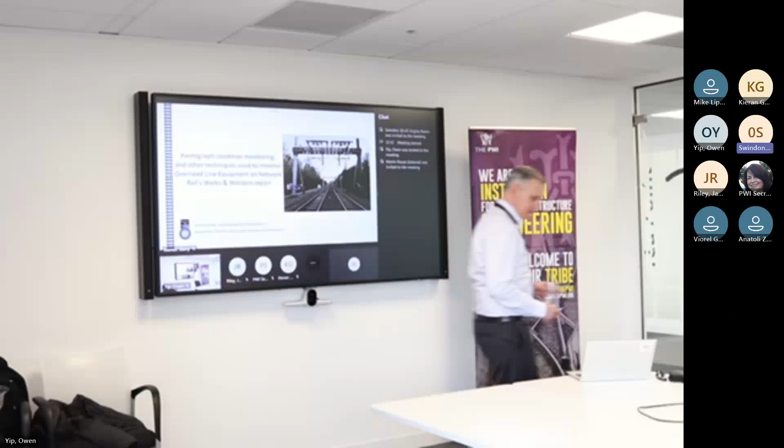So quite a bit to cover. So first of all, thanks for inviting us back. It's the third time we've done a show with the PWI. So come in, it's good to be back. We've done a couple of sessions over the years with the IET. So pleased to be back, and it's nice to be valued.

So this is a bit different. This is about pantograph monitoring, and we're going to take a look at that and what we've learned. And Jay is going to spend some time looking at the case studies. I'm into quite interesting case studies where we're on a journey with this stuff, and we've learned quite a bit. So that's what we've got.

You can see it on the screen. So we've got a system called PanVue, which is a set of overhead mounted cameras or line side cameras which look down at the pantograph. And there's two cameras and a series of illuminators, and that will take an image and that will produce a 3D model. From that model, you can then look at the carbon condition and the pantograph condition. On the side of the track, you can see these two items here, devices. They're the train identification system, and that takes an image as the train goes through. But there is an added benefit, which is not just looking at the pantograph. You can actually look at the side of the train, and it is useful for the train operators to look at the side of the train to look for any damage, vandalism, whatever it may be, and useful for that, as well as being train detection.

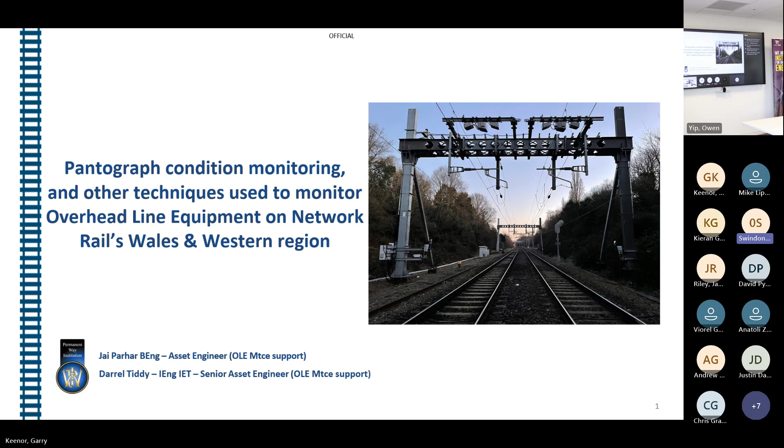Okay, so I won't go through the agenda in detail, but as you can see, there's some key items there. We'll have a look at why it's important to monitor pantographs, why we do it, where we've got PanVue, which is a system produced by Camlin, a little bit about maintenance, and then Jay's going to look at some case studies. Then we move on to a little bit on thermal imaging, which we've used to good effect on the region. And then we'll open it up to some questions and answers.

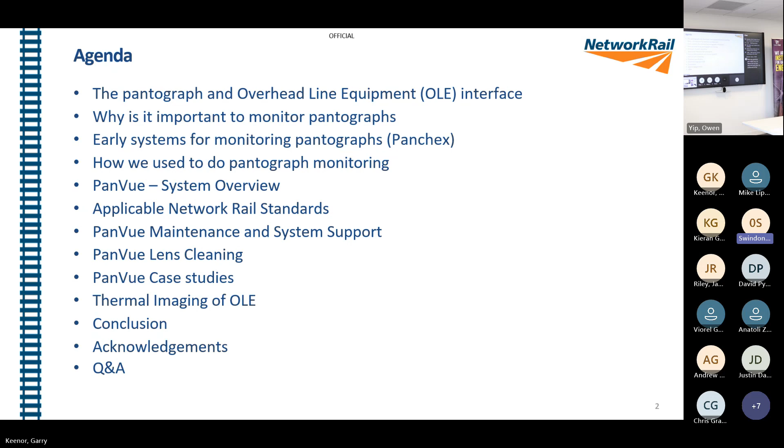Okay, so that's a view from PanVue looking down. And what you can see is a nice, clean pantograph, no damage, no chipping, contact wire. You can see the catenary and the contact wire on the carbon there. And as the OLE engineers in the room know, it's always a balancing act between the correct geometry and the grading of the wire and the condition of the install and the maintenance and the management of pantograph. So everything needs to come together to give us that good current collection interface. So there is this challenge of getting design, we put it into construction, what we end up with is something sometimes a little bit different. So a good interface is important. That's what gives us good current collection.

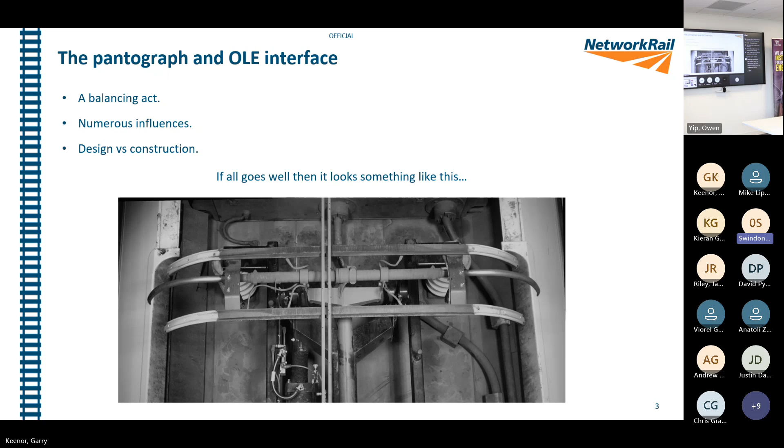And what PanVue does, it allows us to pick up anomalies if those interfaces go out of a good relationship. When it all goes wrong, sometimes that's what you can end up with. That's what happened with us. We managed to lose pantograph, and we've got all sorts of things go wrong over the years. So early detection is important. You see that you catch something before it does go wrong. So that's the same on the overhead line and with the pantograph.

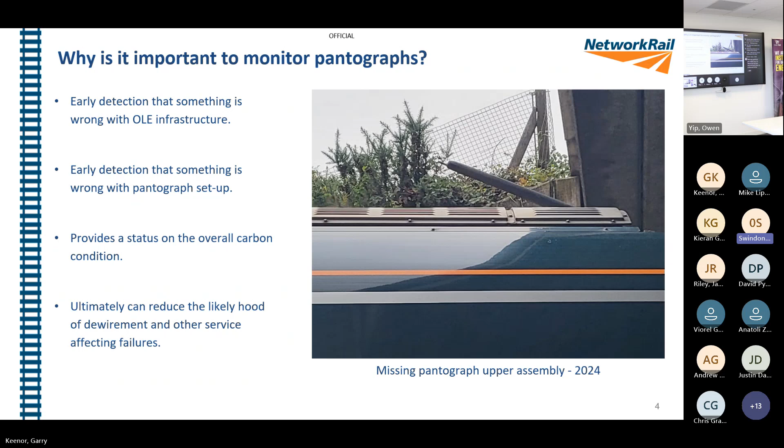PanVue gives us a good status on current collection. So if pantographs aren't chipped or bumped, or the horns aren't bent, or whatever it may be, you can see that on PanVue. So pantograph monitoring gives us that sort of holistic, almost real-time view of what the pans are doing. And pantograph monitoring, as we've used it on Wales and Western, has prevented several dewirements in recent years, and Jay will go through those case studies shortly.

And as we then installed Great Western Electrification and marched all the way to Cardiff, there was no pantograph monitoring system in place, albeit in some kind of fashion. It was in the scope of Great Western Electrification. I think for budget reasons it dropped out, but we were short of any pantograph monitoring capability.

There was a major incident in 2017 where we managed to shut the railway for 2 days between Paddington and Heathrow, because one pantograph was severely damaged and we couldn't find out where that had happened. So we had to put an MPV all the way at Paddington and send it to Heathrow and back. That took 2 days and nights. And then the route director said, 'You can't even find the haystack, never mind the needle.'

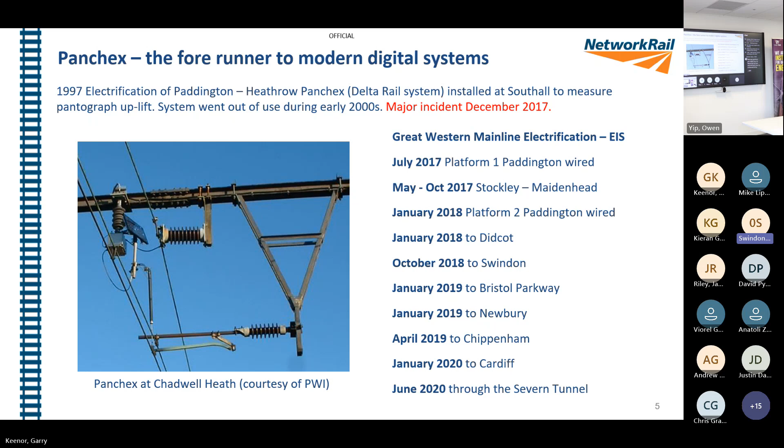That's why we do it. And of course, we had this sort of gulf where we had no pantograph monitoring system on the network.

So the way we used to do that was we'd get notified by members of the public if there's a problem with pantographs running around, or by the TOCs more often than not, or we'd put people on bridges. There was many an hour spent on a bridge in Paddington or somewhere else looking at pantographs with binoculars, for long hours on end, monitoring which trains were damaged and where they'd been, and looking at our train management system, CCF, to see where the train had been. So that was quite a long and laborious task.

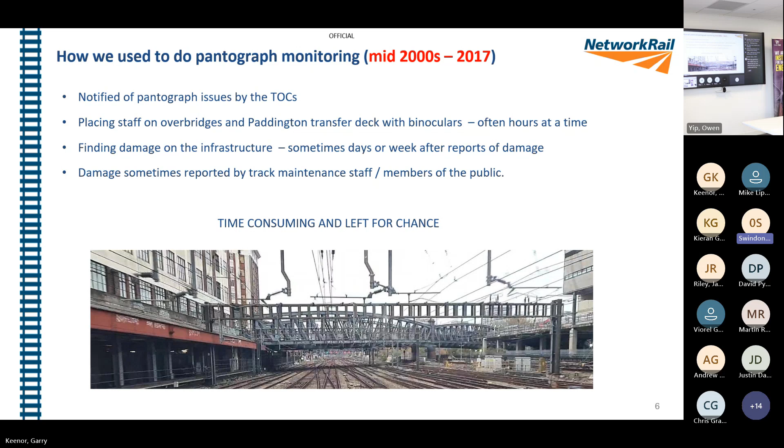As we all know, inside Paddington Throat is a very busy area, and so are other parts of the network. Bridges have been a place to run to when it all went wrong.

During late CP5 into CP6, the requirements document was written, and in CP6 these pantograph monitoring stations were installed across the network. As you can see, we've got a couple in London, Reading, Didcot and Bristol, and we've got the Heathrow installation as well.

So we've got the route pretty well covered, and they're strategically placed. We can see if we've got a problem with trains in and out of Wales, and in the Severn Tunnel we've got Didcot, which is the halfway point, give or take. There are trains going down to Newbury from Southcote Junction, and then trains in and out of Paddington, covering off some of the Crossrail services.

Vegetation is another factor, because we've got bi-mode trains, and trains going down to the West Country and into West Wales can come back with vegetation on them. So we use PanVue to help us pick up vegetation issues as well.

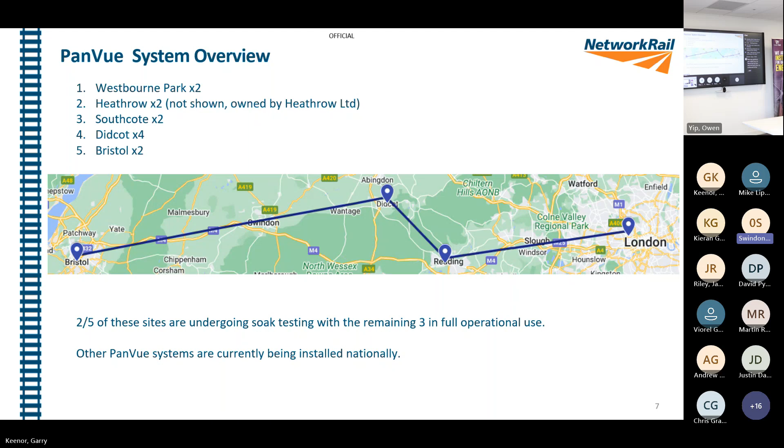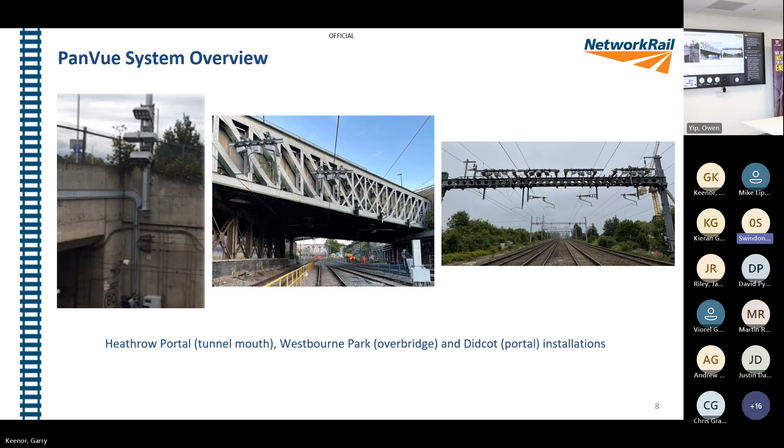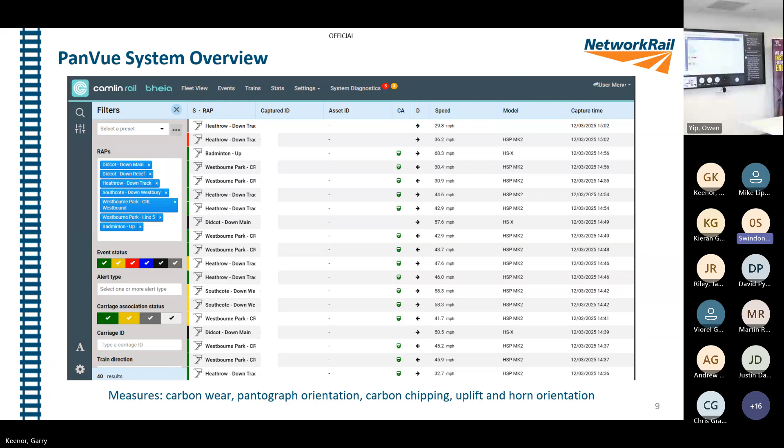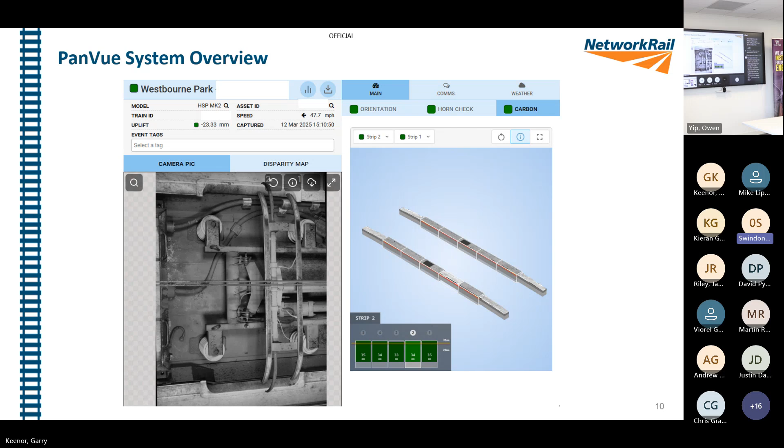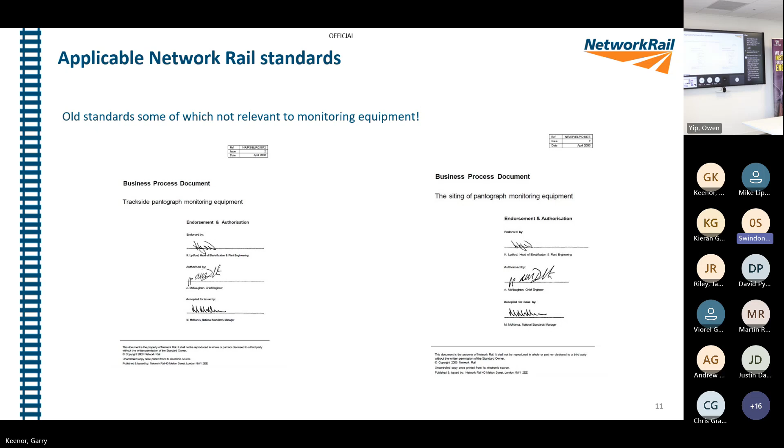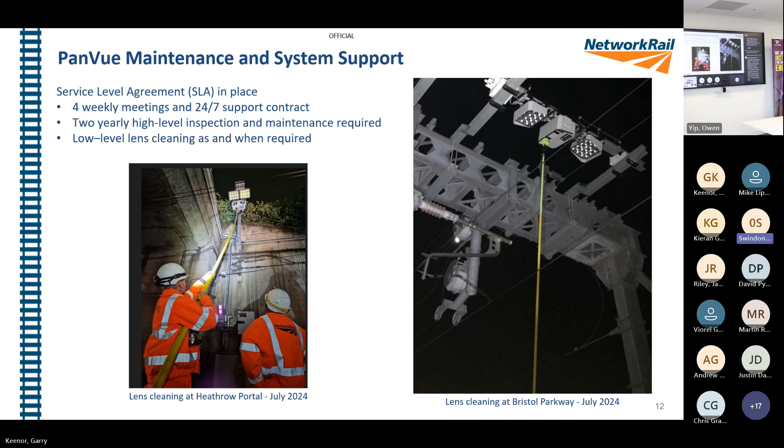So the lens maintenance is important, just like glasses. If your glasses are dirty, you need to clean the lens. So we do an annual clean off a pole. There was an isolation in place. They're insulated poles, as you can see, but that was done under an isolation just to give the lens a clean. Otherwise, you end up with a bit of fog, which is what we see on this slide.

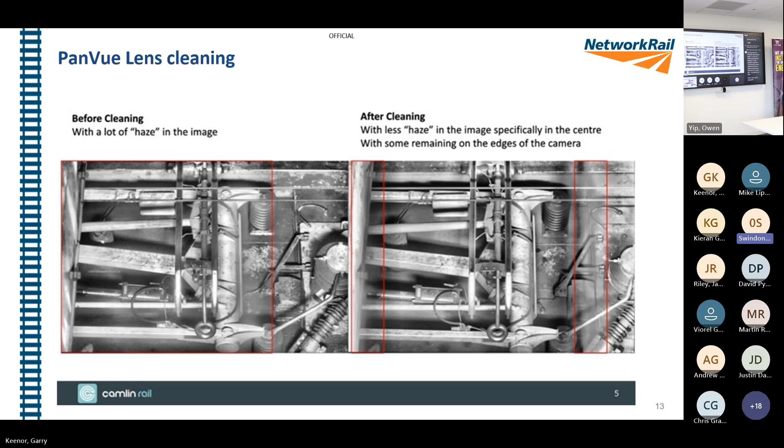Okay, over to Jay. Thanks very much. Oh.

Yes, good afternoon, everyone. So next I'll be talking about some case studies from PanVue, as well as a thermal imaging trial we've done. These case studies will go through the process we applied when we had an incident related to the pantograph, and how we used PanVue to find a solution and then rectify that as a result.

So case study 1, I'd just like to introduce the concept of contact wire uplift. Traditionally, this is measured from the static position of the contact wire with no pantograph present. So that's 0.0 millimeters of uplift. And then when a pantograph passes at a point, you can take a photo, and you can then calculate the difference in contact wire height as the pantograph imparts the vertical force on the contact wire.

Now, the way PanVue does that is slightly different, given that it is taking a picture already under a dynamic condition, so your reference point is already different. During the commissioning of a system, for a 2 to 4 week period, it will take an average of where the contact wire is across those weeks, and that is then your baseline or 0 mm reference point. From then on, any event with a pantograph and wire above that reference point is known as positive uplift. Anything below that is negative uplift.

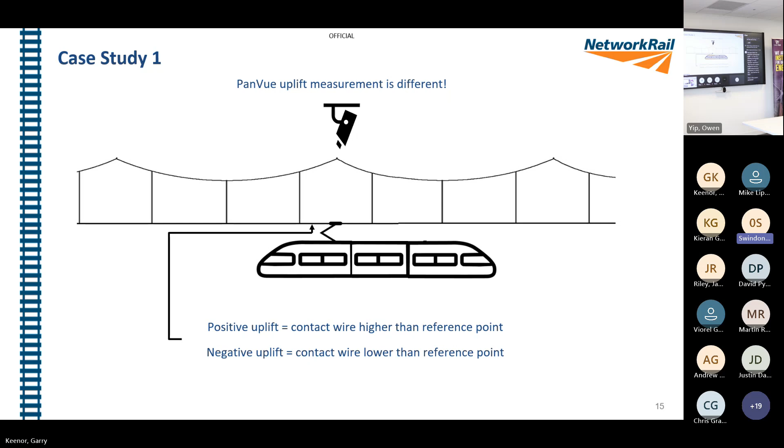So in terms of how we analyze the uplift, there's an analytics page as part of the Thea dashboard that Darrel showed. And this is the normal distribution you would expect: a normal bell curve centered on the x-axis, -10 to +10 millimeters of uplift offset. You'd expect everything to be around 0, indicating that everything is within that reference point, which has been set already. And then you would expect the uplift offsets to drop off in a nice curve shape as you increase in positive and negative uplift.

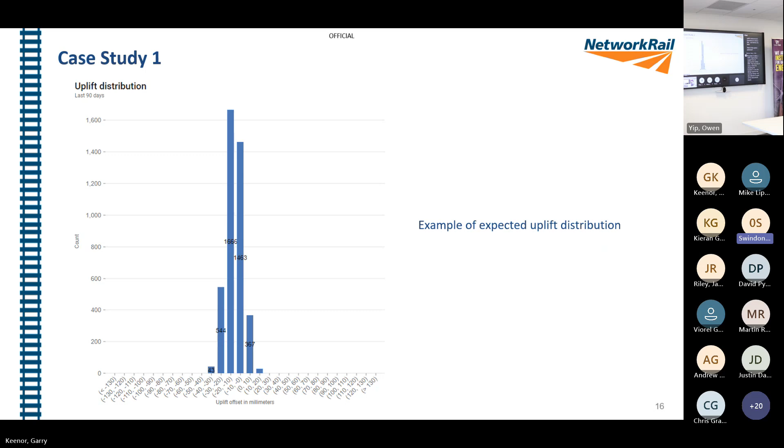So in terms of an incident where we had to use this feature, we had an ADD on the 8th of December 2023. An ADD is an auto drop device in the pantograph carbon, so a pressurized tube. Essentially, if the pantograph carbon takes sufficient damage, that tube will depressurize and drop the pantograph to protect the train and the pantograph.

So we were presented with the image in the bottom right indicating pretty serious damage had occurred, and the normal process we apply is to then request pantograph camera footage, which you can see in the top right there, which was taken inside Heathrow Tunnel.

And the problem with Heathrow Tunnel is that it's very dark, it's not lit like most tunnels, and the best information we had to go off was that image, which just showed some arcing and some steelwork between the pantograph and that. Then we went into the PanVue system itself, looked at the previous event for the train for ADDs, and we saw that image on screen indicating that there was already damage present, and pretty serious damage at that. On that leading carbon, you can see 2 big chips already on there indicating that something had already gone wrong, and that essentially that ADD wasn't just isolated to that one journey that train had made.

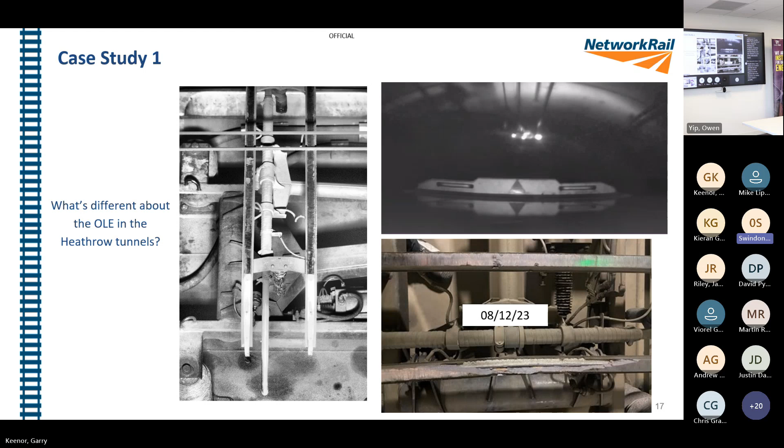So a question to keep in your head, and a question we had to ask ourselves was, what is different about the OLE in Heathrow Tunnel? Why did this train ADD only there? Why didn't it happen anywhere else?

So going on to, again, the analytics. So for this relevant train, there are 2 pantographs present, so therefore we have 2 different sets of uplift to look at. And this particular site had an issue with the uplift offset, essentially where the graph was shifted to the left. So there was an incorrect offset applied, but the shape and the curve distribution is still as you would expect. You can just think of the graph I showed you before as moved along to the left. So the information is still useful.

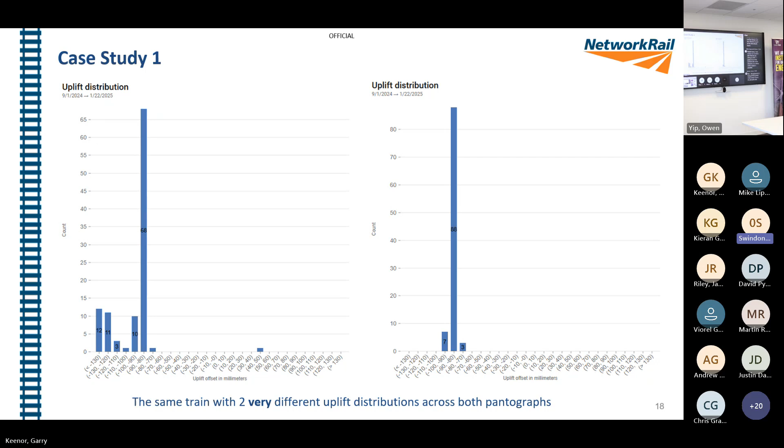The numbers not quite so much in terms of the exact numbers, but what it did show us was that for one of the pantographs, the one on the right-hand side, that distribution is as you'd expect. Things were centered around one particular uplift value, with very few events beyond that. But for the other pantograph, the one on the left-hand side, you can see there you had 12 and 11 events with a difference in uplift of 50 mil. And that is the useful information to take in, that there was a 50 millimeter offset in some events for whatever reason.

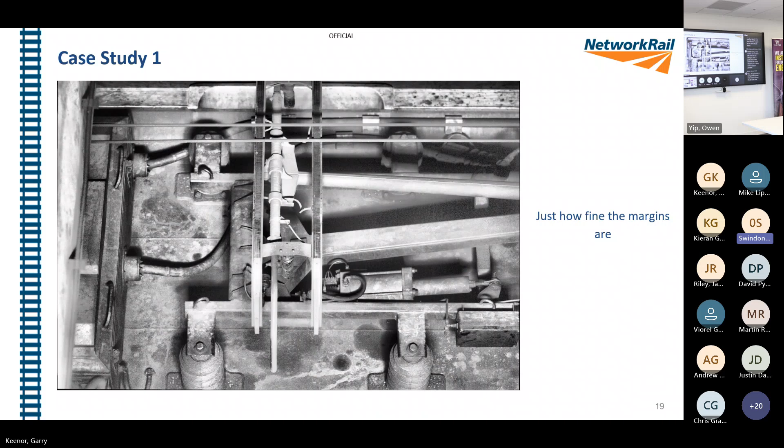Now, what does that actually look like? It doesn't look like much. So you can see here, that's what 50 millimeters of uplift difference looks like. And normally for conventional overhead line systems outside, that's not a problem. The system can tolerate those differences. You wouldn't get a problem generally. But in Heathrow, things are different, as I said, and this is how things are different.

So clearances between the overhead line and relevant steelwork in some areas are very, very tight, especially in areas where you have new wires coming in and other wires going out. You can just imagine on the left-hand side there how 50 millimeters of uplift difference between that contact wire and that piece of steelwork could cause the pantograph to hit that with some force.

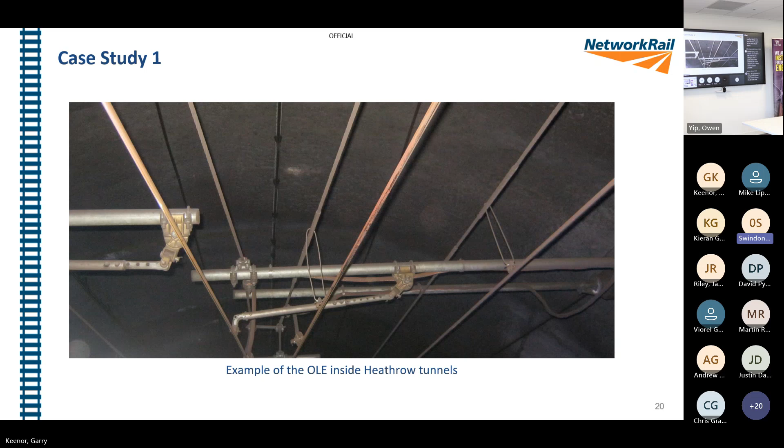So we had the maintenance teams patrol the area as normal, looking in the first instance for if there was anything on the overhead line hanging foul, any evidence marks of anything. They did that twice. They didn't find anything, and the other information we had already was in that time, no other trains had shown any signs of new chipping, and no other ADDs had occurred. So that was indicating to us that this was currently isolated to one train, and in particular one pantograph. So after many discussions with the relevant TOC, we agreed that it would be the best idea to just do a complete pantograph assembly change, essentially reset the system and see how it went.

Something to also note on this in terms of uplift: as we move to a world where VCCs are more prevalent, clearances get much tighter. That's good. And the VCCs will protect structures, the overhead line and the trains, but it's also important to understand how uplift comes into play where you have VCCs now, because if you have a train running around with the wrong uplift, you can quite easily cause much more serious damage than you would ever normally get. So it's important to understand and probably introduce uplift monitoring systems. Maybe not this, maybe an onboard train thing, but uplift should be considered, as generally it's not really measured in service, apart from a few monitoring systems like this.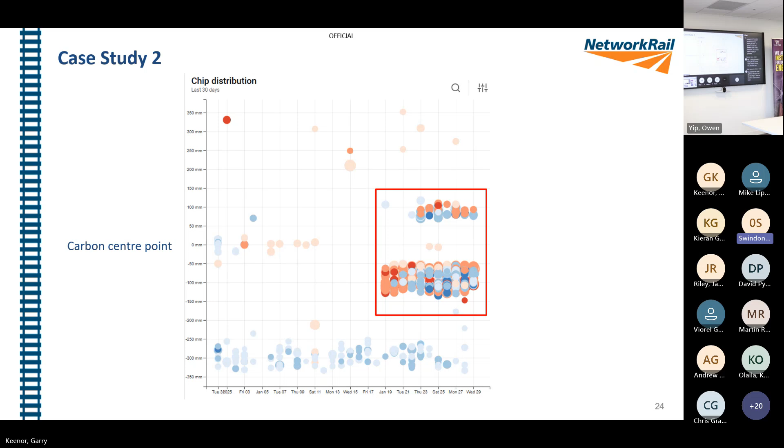Looking at the x-axis, you can see, as I said, that it was a step change overnight. January the 19th, suddenly had a massive influx of chips, all around 100 mil from the center point of the carbon. So after discussions and based on relevant experience as well, it was assumed that this was likely to be caused by a section insulator in some way.

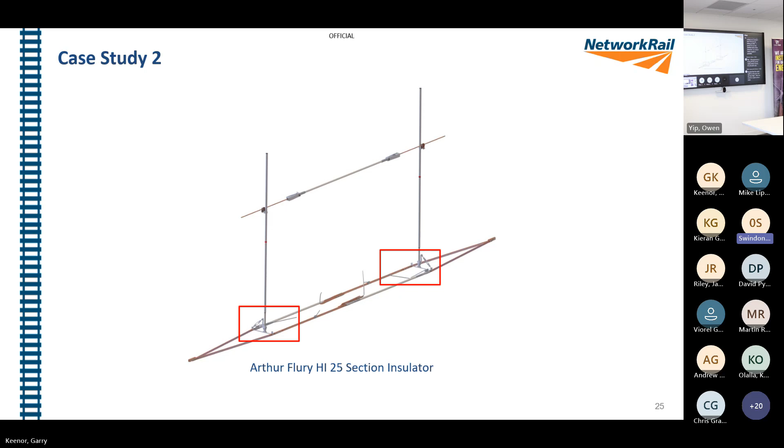So this is an Arthur Flury HI 25 section insulator. So what this does is just separate electrical sections of the overhead line system, and you most commonly find these around crossovers and sensor points and such. So we had the team, again, as I mentioned, like we did in Heathrow, they controlled the track, had a look around at all the SIs, and luckily did find the culprit.

And the believed cause of this is, over time, the cant between the SI and the track has gone out of alignment. So essentially the train is riding over at one angle, the pantograph is as well, but the SI is at a slightly different angle. And then the pantograph is going over one of the rods harder than the other, and you get excessive wear on one of those ends.

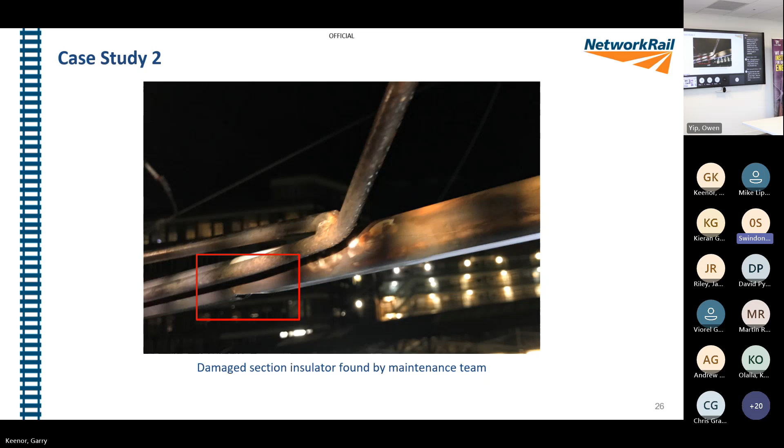So just a couple final things on PanVue. ICE is quite a new thing. We've realised that it can help monitor. So I had discussions with the manufacturer at the back end of last year after I found that at Didcot there were some good images coming through of arcing on the carbon between ICE and the contact wire.

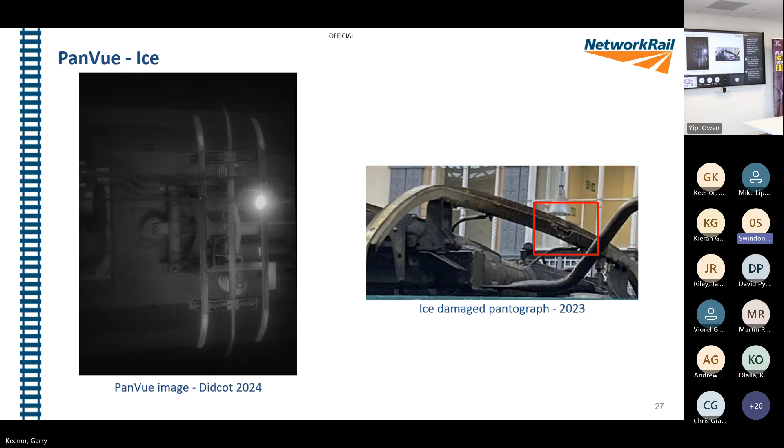And it's important for us to be able to manage this, and having this as an additional feature is good, because in the worst case you get the image on the right-hand side from 2023 whereby you get excessive localized wear and also heating on the carbon, but also the aluminium carrier as well. You can see that it's blown a hole between the two. So this is important for us as the infrastructure managers, for the TOCs, and also for the carbon manufacturers themselves to understand if anything can be done to mitigate against this. So this one is more of a new work in progress for Camden, but good nonetheless.

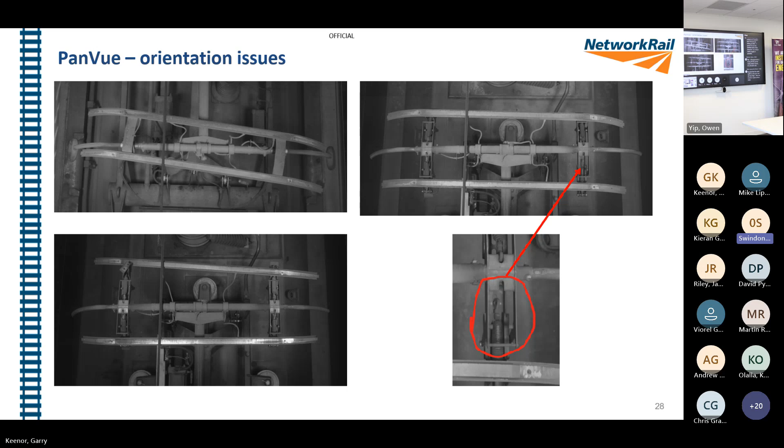So next, I'm going to talk about thermal imaging of the overhead line. This is a trial we've worked on in the past year for a specific problem we had as well.

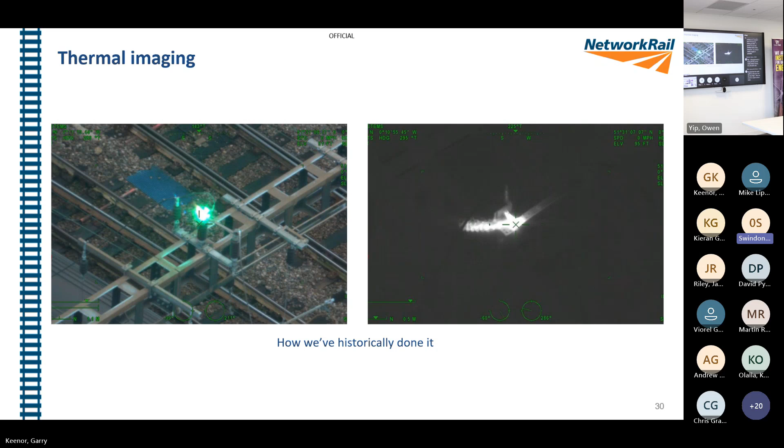What it can't do is help you for things like this. We had a flurry of earth wire failures suddenly appearing with no immediate and obvious cause. Earth wires generally do not fail unless something falls on them. It takes something a bit particular for them to fail in the way they did.

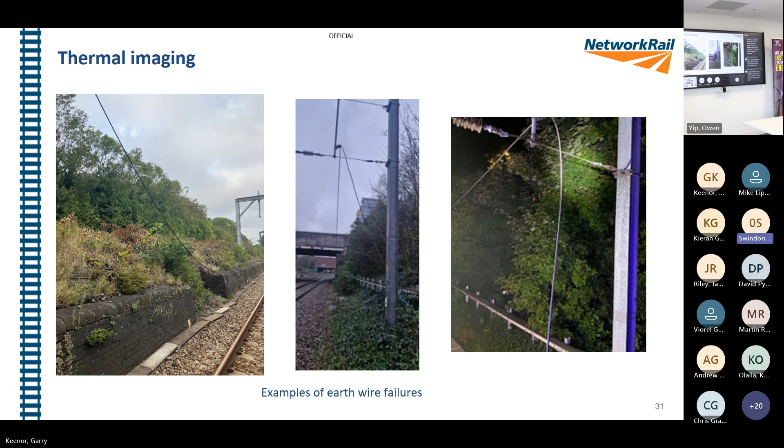The reason we were starting to think that the clamps were causing a failure point is that the clamps are generally only rated for fault current conditions, not for continuous current carrying conditions, as the earth wires are themselves.

So as I said, how do you monitor a moving fault? A helicopter isn't really suited for this particular application, nor is it financially feasible to run a helicopter 5 days a week for 10 hours a day. It just doesn't make any sense to do that. So we had to think, how can we approach this slightly differently?

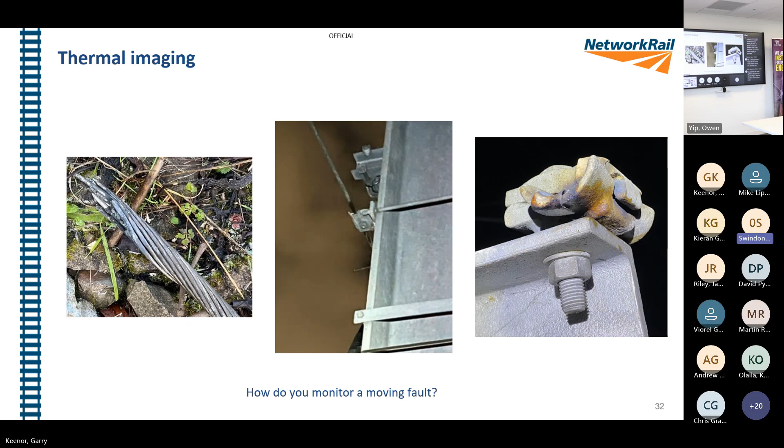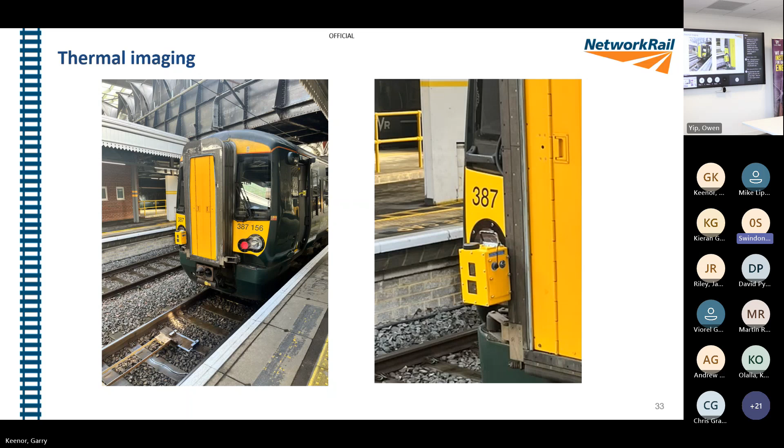So what we did was we worked with a company called One Big Circle, who developed the AIVR platform, for those familiar. The box on the screen is their third rail thermal monitoring camera. We approached them and said, do you have anything that can do thermal imaging? They said yes. Then we asked, can you modify it for the overhead line? They said yes. So they oriented the thermal camera, which is at the top of that box, and the non-thermal camera in such a way that it would essentially look at the overhead line and take good video footage of that. So what does that look like in practice?

So this is the AIVR dashboard, as I mentioned. You're able to flick between non-thermal and thermal view. In the bottom right, you can see that the software will flag up any thermal hotspot detections, which you can set the temperature to whatever you like for it to detect. In this instance, this was a trial using the existing algorithm from the third rail system, just to see if it would work essentially, and more so just to get the footage rather than the detections, which weren't the key part of this. The key part of this was just to get the video footage of the system.

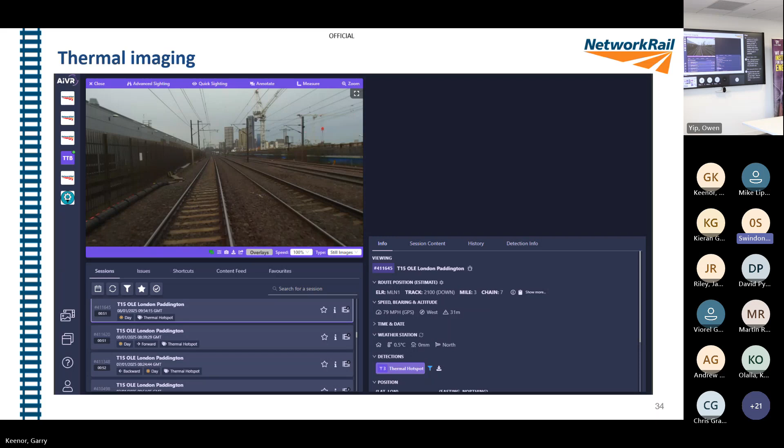This is just a screenshot of an example location of the non-thermal view, and this is the thermal view. So quite a different view, as you'd expect, and a good view nonetheless. You're able to quite easily distinguish different features of the overhead line system, as well as the track as well. We ran this for weeks, months, and are still using it now. It's sort of become business as usual.

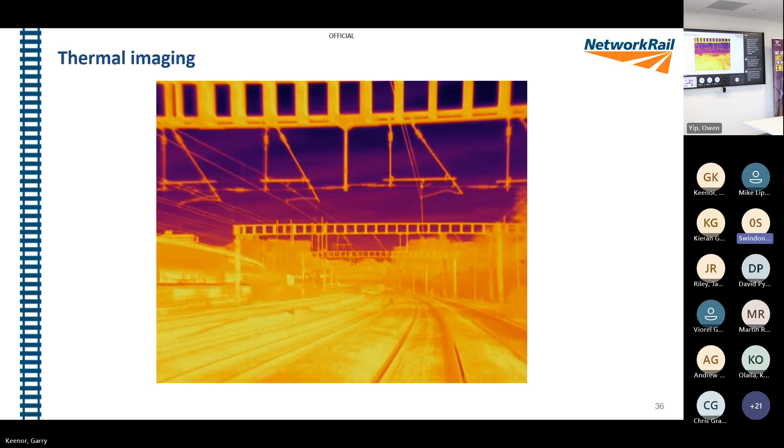And it was able to find areas that had not failed. So the whole point of this was to find things before they failed, intervention before failure.

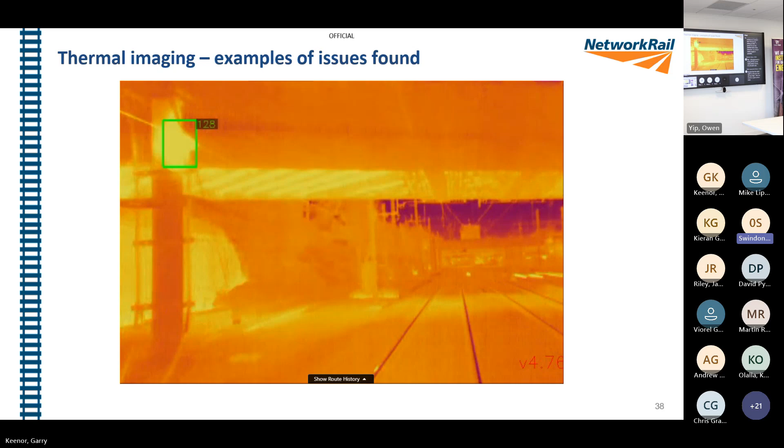It was detecting some earth wires, in particular the clamps that were showing hot. So we've got an example there of one at 43 degrees, and another at 128 degrees. That one especially is well on its way probably to failure.

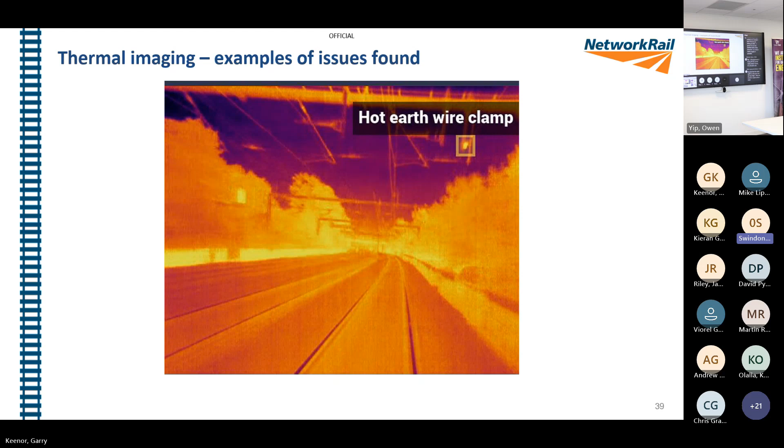As I said, it was a trial, so it wasn't detecting everything. We didn't expect that—there was still a bit of manual checking to do. Luckily, we were only running this in a relatively small area, so reviewing footage manually didn't take too much time out of anyone's day.

Following that, we found there's actually quite a few use cases for this, rather than just our specific problem. We think it could be used for entry into service testing, to see primarily if you have any install issues related to things like switches or any bonds in the traction system.

It also shows you thermal performance of the overhead line system in tunnels, which has not really been done before, especially on our region. This was the first time we had a good look at the tunnels and how they're performing thermally. You've got an example there of Heathrow.

You can also see the thermal performance of the overhead line in different load conditions. So you could run it in the morning peak or the evening peak, and likewise when there's not much load at all, to understand how things are performing differently.

For us, the biggest one was that we can actively manage known thermal risks—we can see if things are getting worse or not, and the rate they might be degrading, to help us understand whether we need to intervene and when. Lastly, there's extreme weather monitoring.

We do plan on running this, for instance, if we get a heat wave—we can deploy it in a particular area to understand what temperatures we're seeing on the system. And not just for the thermal side, we also have the non-thermal view, so you can look at other assets as well. The camera is 2-in-1, so there's a benefit for other things too.

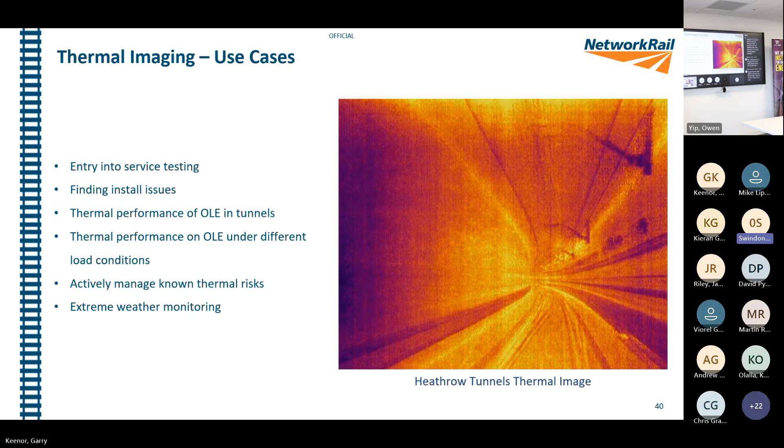We're almost there—thanks for your patience and thanks for listening. So yes, PanView, as where we started, it's been not quite a national uptake on PanView. Pantograph monitoring with PanView has been used on a couple of other Network Rail locations now, in Manchester Metro as well.

It's important—asset health is important. So if we look at pantograph and contact wire, PanView gives us that view. As we've seen, it's certainly saved some dewirements on the Great Western region in the last couple of years. It ties in with the aspiration of GBR, bringing track and train together, and everything in between, which is good. So I think it's an important tool for us, and it's given us good benefit so far.

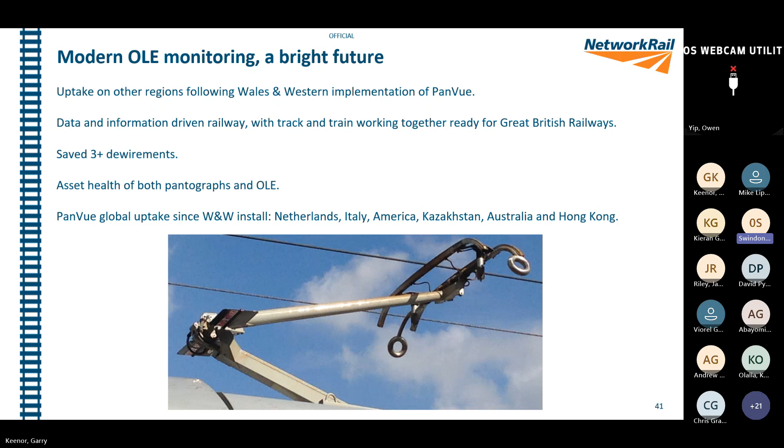So yeah, lots of acknowledgements. It's been a bit of a project—it's been slow because of access and resources and so on and so forth. But nevertheless, we got there.

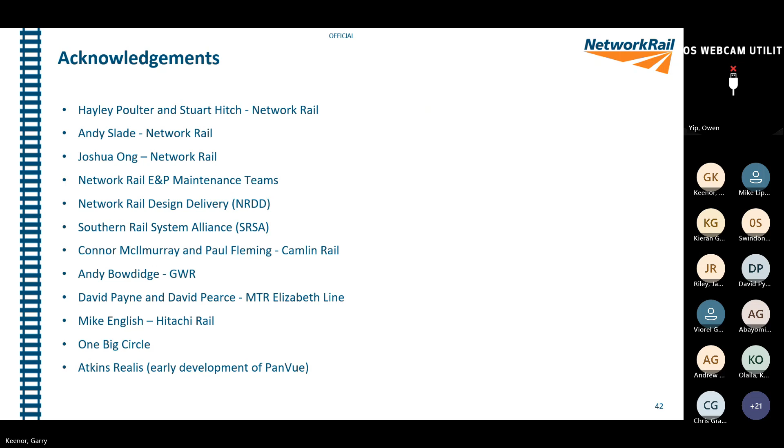I can see Gary's been answering online queries throughout. Was there anything in there, Gary, that you want to bring up? Hang on, sorry, well look, Eric.

I've got a question. Did you have to put in any deviations against the Network Rail standard for pantograph monitoring sighting? No, sighting wasn't an issue. For this, the existing standard was for pan checks rather than pantograph monitoring systems, but the sighting one wasn't an issue.

There was one about weather temperature. The standard is essentially a description of pan checks - it's a standard written around one technology. It's out of date, quite right. Because then you've got to make sure it's on a straight track and all this kind of stuff, which with image monitoring and image recognition you don't necessarily need to do.

And the reason for asking - did you have to put a deviation into the standard because it wasn't applicable? And I think there was an aspiration to rewrite those standards.